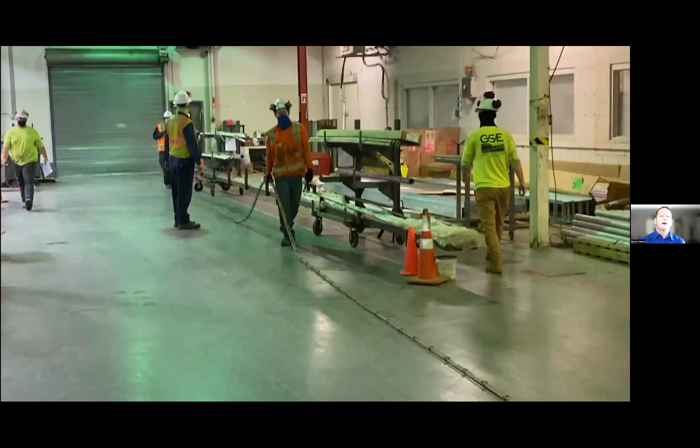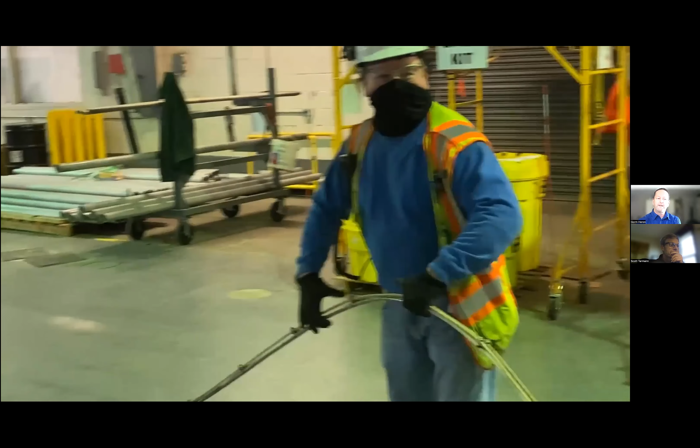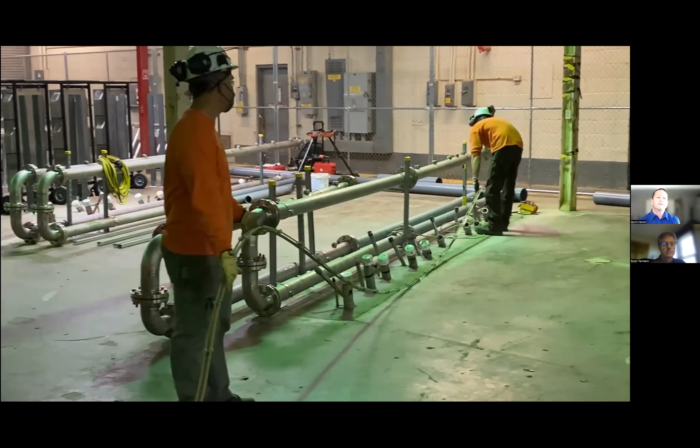What we're talking about today and a week from now is a very, very cool site. And I want to start by showing you something that could look kind of weird to most people. Essentially, this is a crew of workers carrying a 200 feet long device and slowly installing it, sliding it into the ground through one of these many stainless steel casings you see installed here. These go at least 120 feet below grade, and some of them as far as 200 feet underneath the building.

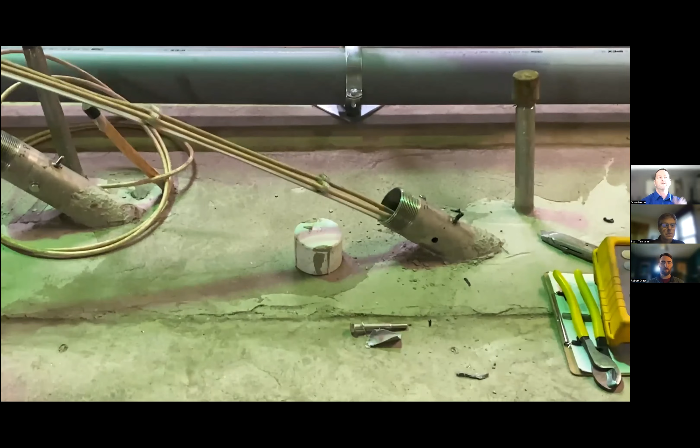And this is all done custom in order to treat a TCE source area, which is located between 50 and 120 feet below grade, below a building where we couldn't get access. So the first webinar we'll be talking about how did we design and install a system that could actually remediate TCE that deep underneath an area where we don't have access.

And the second webinar next week, we will talk about what data comes out of that. How do you know how it's going? How do you know when you're finished? And how can you convince the regulators that you are? So that will be a week from today.

But today we have two wonderful panelists. We have Scott Tarman from Ramboll, and we have Bob Glass from TRS. And I'd like to kick it off by starting to ask you, Scott, to give us a little bit of a background about the site and the objectives of this project. Sure, Gorm. Thank you, everyone.

So this is a Superfund site in northern New Jersey with US EPA oversight. The site is divided into three operable units, or OUs, OU1 and OU2 and OU3. And OU1 and OU2 are basically down gradient. It's an area that's considered where the dissolved phase CVOC impacts are. It's situated in the Pohatcong Valley in northern New Jersey. And OU3 is the subject where the source soil contaminations are, where the source originated from. And that is the area that we're focusing on in today's webinar.

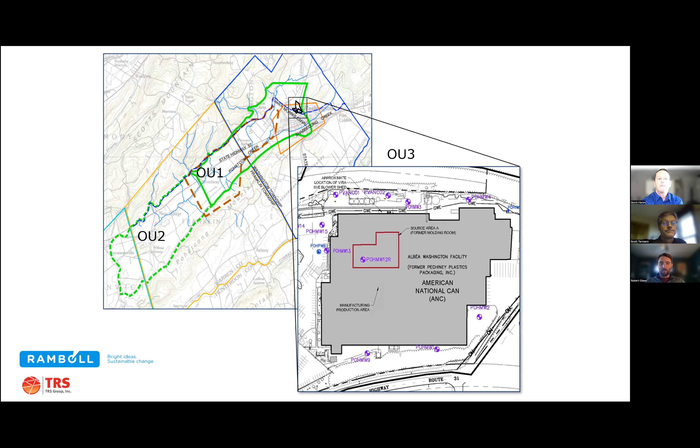Fantastic. Of course, the first step in any type of remediation, definitely a thermal remediation, is to figure out where the blob is that you're treating. And Bob, maybe I can ask you to cover that, basically the target treatment zone and our conceptual approach for treatment. And when I do that, we're focusing in on this red area where we had access, and then the source area, which turned out to be bigger than that, right? Sure. I think we have a slide that shows a more zoomed in portion. Yeah, there it is.

Something that was interesting was during that installation, when we first started on what we thought was the blob, we were actually able to collect more data. And subsequently, we were able to reduce that footprint a little bit on either end, which was fantastic. That's less infrastructure that we have to install. It's less energy that we have to use. It results in a cost savings for the client. So we kept learning as we moved beyond the design phase and into the installation phase, which I think was super efficient for us.

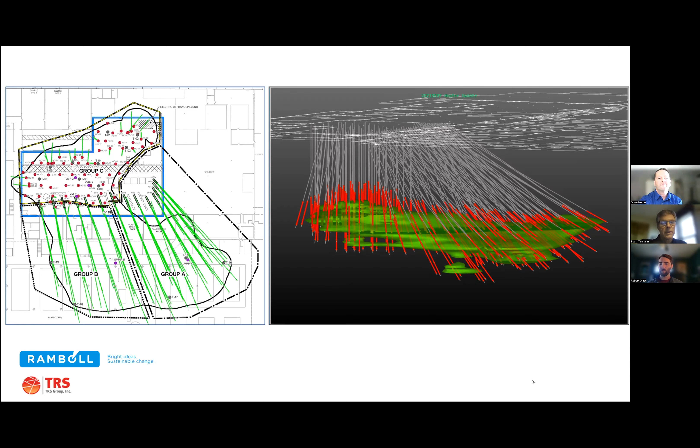Sure. So a really important element of the design phase was being able to determine that the system could be constructed with the proposed heater layout that was designed with the EVS model shown previously. We had to make sure that you could get in there with drill rigs and complete those heater casings at their locations. So low overhead clearance presented, and also the presence of structural impediments such as building columns, and then also there are overhead utilities, air ducting, various things of that nature throughout the interior room.

What we ended up doing is a design evaluation that used a 3D point cloud survey to identify interferences prior to mobilizing for drilling. The ceiling clearance was only about 14 feet, and the ventilation ductwork and overhead utilities made clearance in some of the other areas much less. So the 3D point cloud survey was done using LiDAR, and the survey essentially helped us look at where those locations could be done, and plan for the use of up to 4 drill rigs within that room.

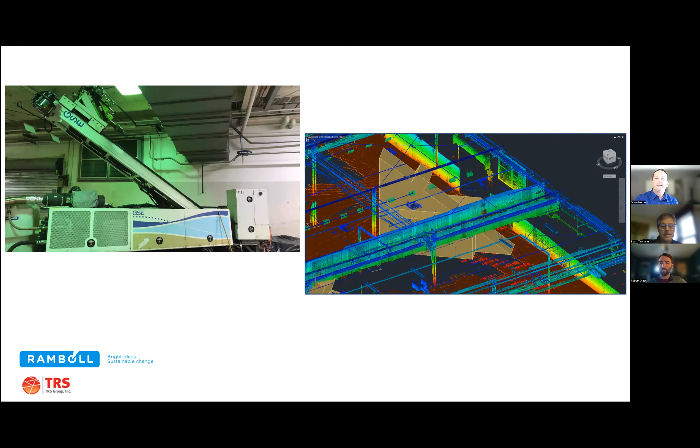Certainly. So for starters, what I'd like to talk about is the onset of drilling. Thank you, Gorm. At the onset of drilling, it was really necessary to install the heater casings accurately and to verify the constructed angled heaters were within tolerance limits specified by the design. So state-of-the-art surveying equipment was used to accurately align the drill rig when setting up on the angled heaters.

and we'd go back and do continuous checks on that for the first two to three drill strings after they were advanced, just to make sure that we were on the proper trajectory and alignment. So that tool was really, really important to making sure that our target zones would be hit.

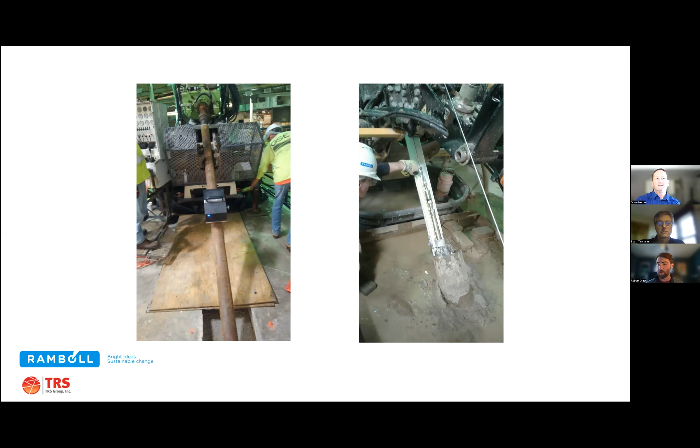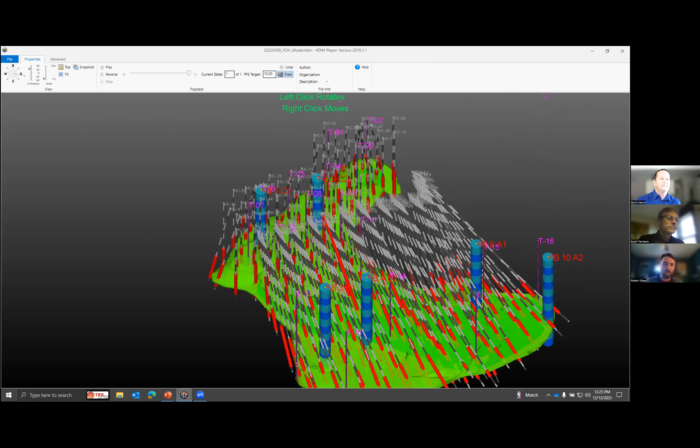We can. Yes, we can. This model? Yeah. So this is ultimately what we made with the data that Scott's talking about, right? And this is how we made decisions based on, do we need to adjust the entrance point or the angle of an additional heater based on what the one we just previously installed did.

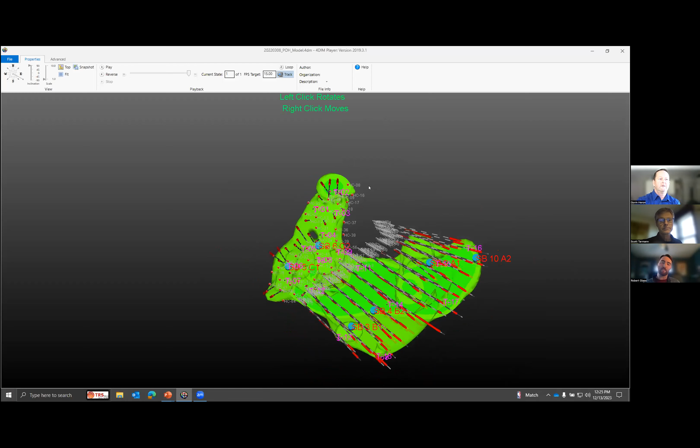So you can flip this all around 360 degrees and identify those gaps in the coverage and then make adjustments. So this was a daily exercise for us, looking at did we nail it or did we move a little bit, and what can we do to fix it? A very, very powerful tool. And you guys that will attend our next webinar will see more of this and hear about how we used it day to day in operations. But yeah, very, very critical tool.

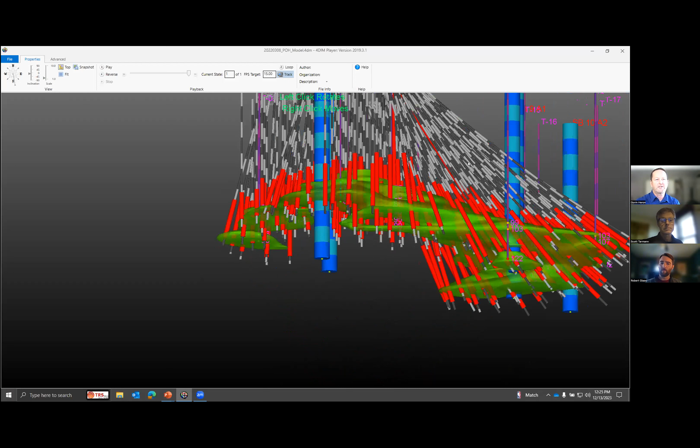So one of the things we could do is kind of take a virtual swim down right here and see what's the distance between these two. These are two heaters, as Scott said, 22 feet or so. It's like, okay, we better install another one in between because this area will not get hot enough. We simply can't sample everywhere. So we needed to know that our heater coverage and all our hot rods would basically cook the whole thing, right? Because we couldn't take data everywhere.

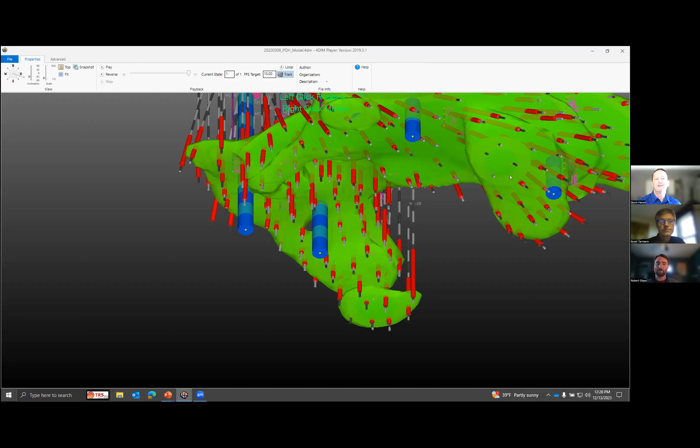Did you mention how many additional heaters we needed based on this survey, Scott? We needed a total of 7 additional heaters, Gorm, which really wasn't too bad considering 178 total heaters. Not too bad. Cool. Very good. So I'm going to flip back to you, Bob, and ask you to just explain very quickly the conceptual model and the approach, how we actually got the TCE out.

So as Gorm alluded to, we had co-located vapor recovery screens that were under a constant low vacuum to sweep that steam and that contaminant up into our treatment system. And basically when those heat fronts converge with one another, you have full treatment. And that's thermal in 10 seconds. It's a little more complicated, but basically that's it.

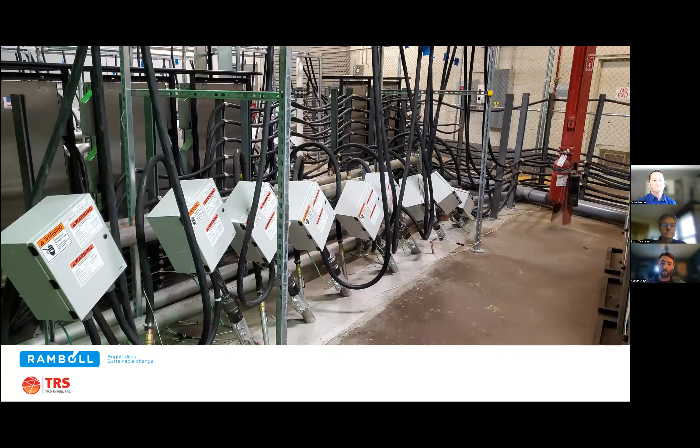The box on top is connected with these electrical cables back to breaker panels and ultimately back to our power source. And that's how we would regulate power to individual heaters. There's a cable that stretches down typically, down to 60 feet below grade, but on the angles it was longer, and that connects to your heated element, right?

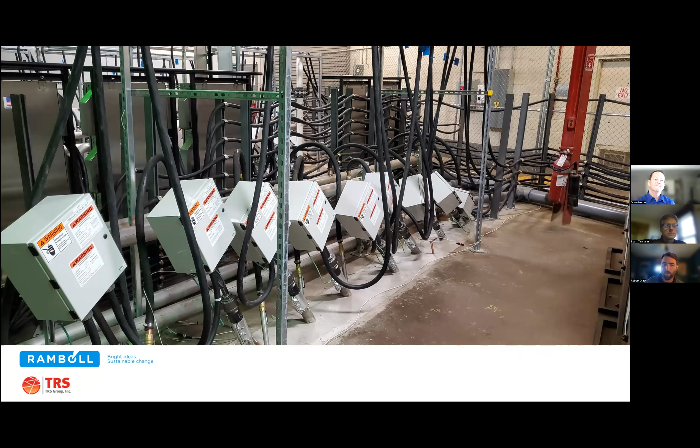It's hard to see, but next to the heater boxes is a smaller stainless tube. That's our vapor recovery screen. And that feeds into the larger stainless steel header you can see in the back and ultimately to our process treatment. But there's some other pictures, I think, that show that a little better. And those of you who were here from the beginning of the webinar, the video I showed is essentially how we put the long heater element into one of these. We slid it into this 200 feet long hole in the ground, if you will.

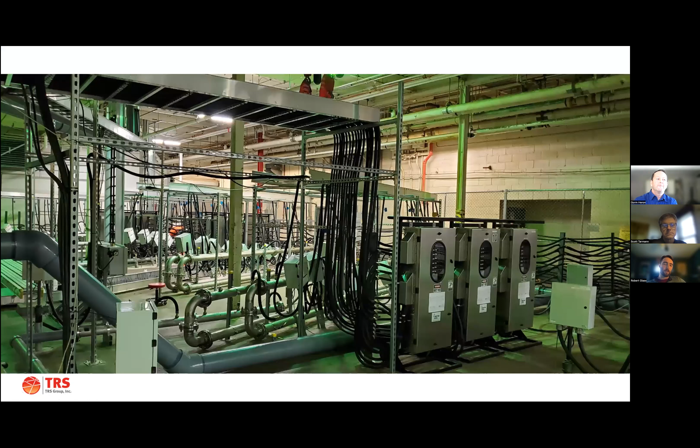There were lots of installation challenges here at the surface. You can see we did a lot of overhead routing, right? There were lots of things to take into consideration. We needed ingress and egress into the work area. We needed to honor arc flash boundaries for all of the boxes, as well as all of the panels and the various equipment. And those arc flash boundaries are variable. So that was something we had to consider.

These stainless steel headers are very hot, right? That's how we're collecting our steam. So they can't be touching electrical cables, for example. So a whole host of logistical challenges and thought and design went into what you see here, ultimately making it a workable space in a relatively small area.

And so Bob, you mentioned that a pathway needed to be kept across the interior room. That pathway was for the facility operations because of the central location of this room relative to the building and their operations. It was critical that they maintain a thoroughfare through there so they could get equipment through and materials through. So that made it even more of a premium for space inside the interior room to place the equipment.

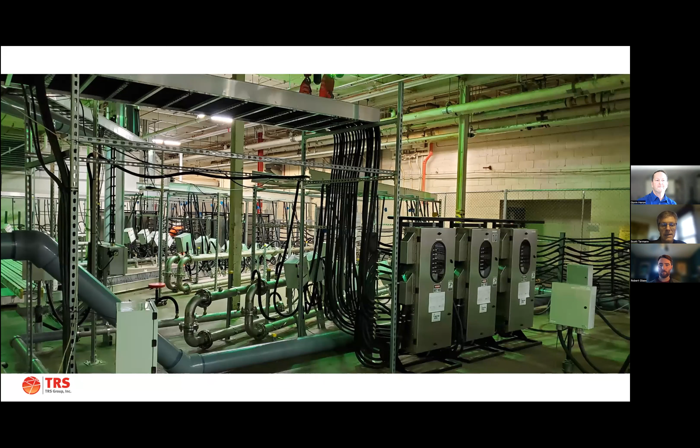But because that center pathway across the interior room addressed the center of the room, we ended up having to put a lot of the piping and cables, routing them outside onto the roof to minimize that disruption and also to free up space inside.

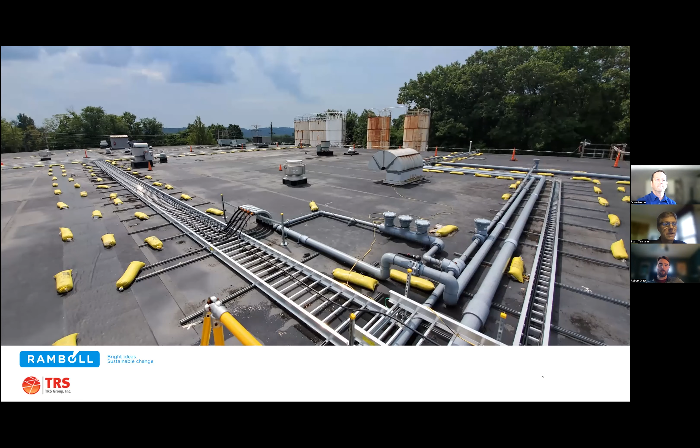So here is a figure that shows where a lot of those cables and piping that were shown in those previous photos went up onto the roof, and we went across, and then where the outside treatment equipment was located. It just made opening up that area so much easier and allowed us to essentially avoid a lot of issues.

Yeah, and our process equipment that you're seeing here, that has to be outside, right? We've got cooling towers and generators and blowers, all sorts of things that can't be inside. Even if we had the space, we wouldn't have been able to do it. So going across the roof ended up being the most direct path, or the easiest path for us, but came with a host of challenges all its own. We had a lot of infrastructure there.

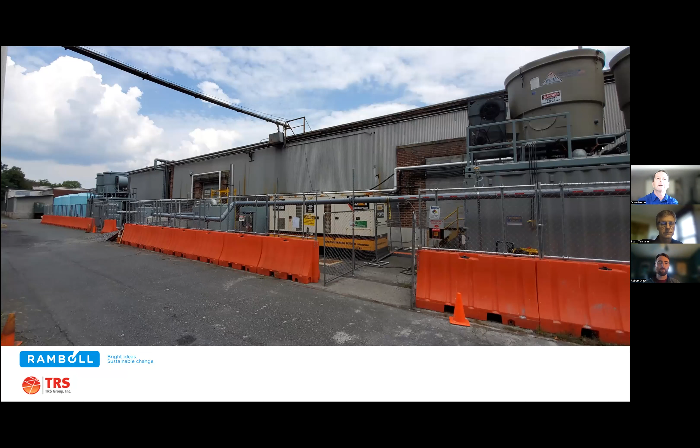One person, Michael, asked if we considered horizontal directional drilling to steer the wells for their entire distance. That's a great question. It's not a conversation that I engaged in, but if you have suggestions on contractors that can do that, I am all ears, because it's something that we've considered for other jobs. For this one, I don't know the process that we went through to land where we did, but because of all of the discrete angles, I think...

I can shed some light on it. So when we first were scoping this work out, we did look at trying to access the contaminated target treatment zone from the exterior of the building, essentially because of where that treatment area was with respect to the outside of the building.

It would have increased the length of drilling, at least doubled it for some of those areas, just to get down into the center portion of that building. So that would have made drilling a lot more challenging just from an equipment limitation reason.

But moreover, even on the outside of the building, there were access restrictions. On the south side of the building, it was very tight. The property boundary isn't much more than about 75 feet on the south side of the building. And on the west side, that was used mostly for employee parking, and space was really a premium out there. So that really led us to only one option, and that was doing it from the inside of the building and doing angle drilling from within.

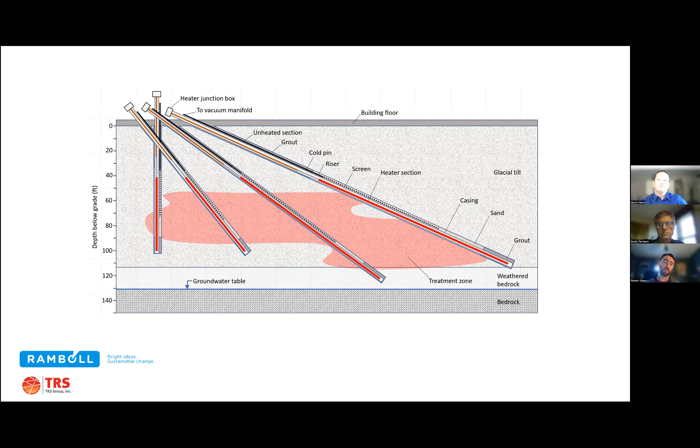Another really good question in there is, one is asking, does this work below the water table as well? Sure. Yeah, thermal works great below the water table. This particular brand of thermal, thermal conduction heating, is very sensitive to water. So if you have high groundwater flow, it's not that thermal conduction heating won't work, it's that you need to manage that via hydraulic control.

And Gorm, you can speak to this more eloquently than I can. I mean, you can definitely use it in those situations, but there might be other thermal technologies that are more appropriate. Yeah, essentially thermal conduction heating and electrical resistance heating is, at most of our sites, used both above and below the water table at the same time.

If at this site we had to treat below the water table as well, we would have had different challenges, because we have bedrock down there, and you can imagine it's hard enough to drill with Minisonic 200 feet down at an angle and hit a rock, and then you have a deflection of the drill casing, right? And Scott gets busy with his DeviFlex tool. But if you're trying to penetrate bedrock down there, it would have been even more difficult. So that would have been a drilling challenge.

But technically, yes, if we were below the water table and there was more heat capacity, we would have had to have a tighter spacing between the TCH casings. So it would have looked quite different, but luckily we didn't have to. This was a vadose zone remedy.

There is just an amazing, convenient question from Nick, and I'm going to use that as the final question of the webinar and thank both of you for your participation. Nick is asking, is there enough space in the work area to drill and collect performance soil samples to figure out when you've met your objectives? What do we say to that? We say tune in to the next webinar to learn more.